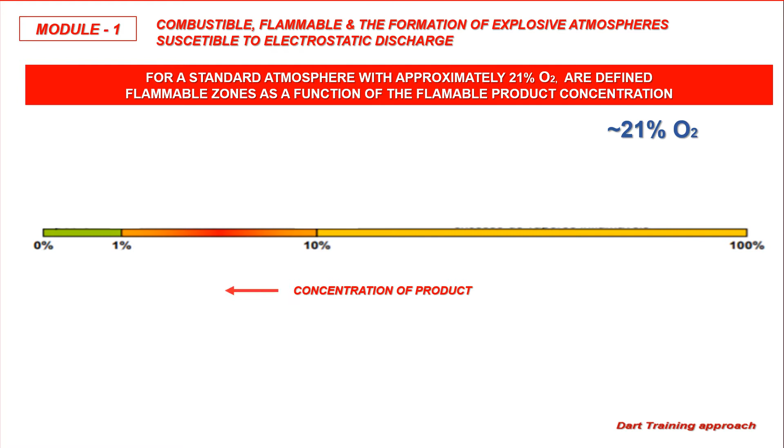So, what really is an explosive atmosphere? Let's take a first approach to the definition, taking as reference an imaginary line that shows relative concentration of flammable and combustible products, from 0 to 100% of product, for an oxidant concentration, in this case O2, fixed around 21%, which is the oxygen concentration in atmospheric air.

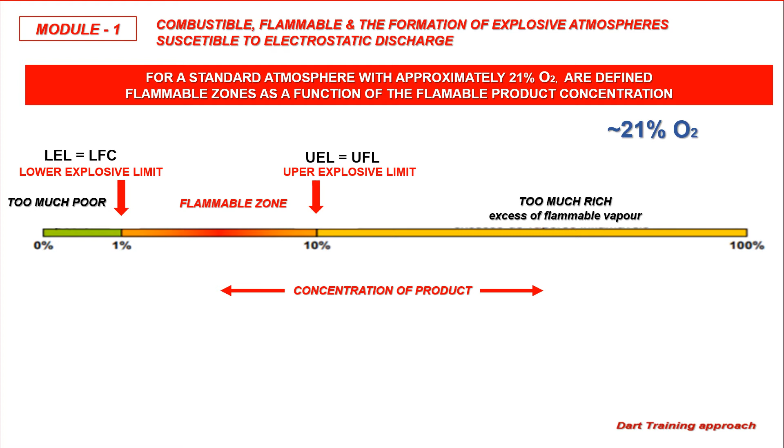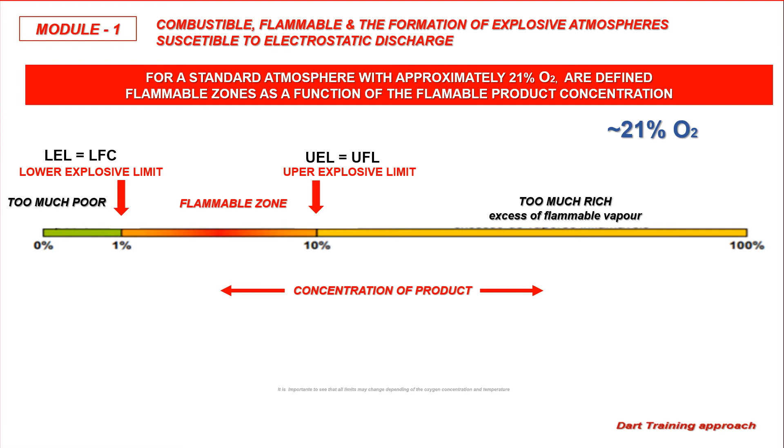The limits for the concentration of flammables are naturally defined, from which flammability and explosion are no longer possible for natural, physical and chemical reasons. We then have the lower flammability limit and the upper flammability limit, as indicated in our diagram. It's important to note that all limits may vary, depending on the greater or lesser presence of oxygen and temperature variation.

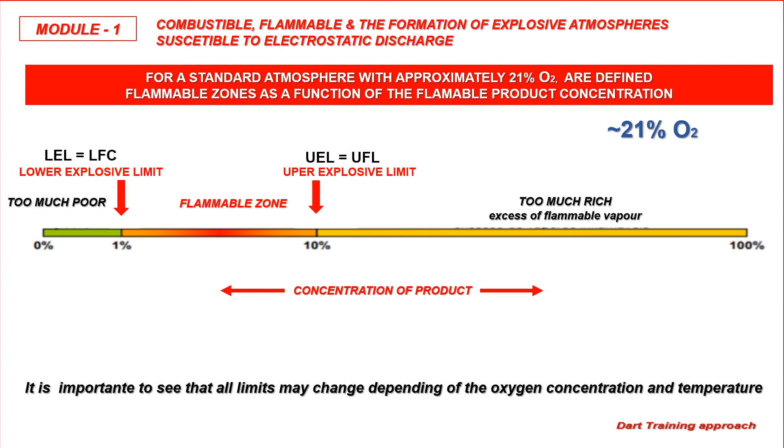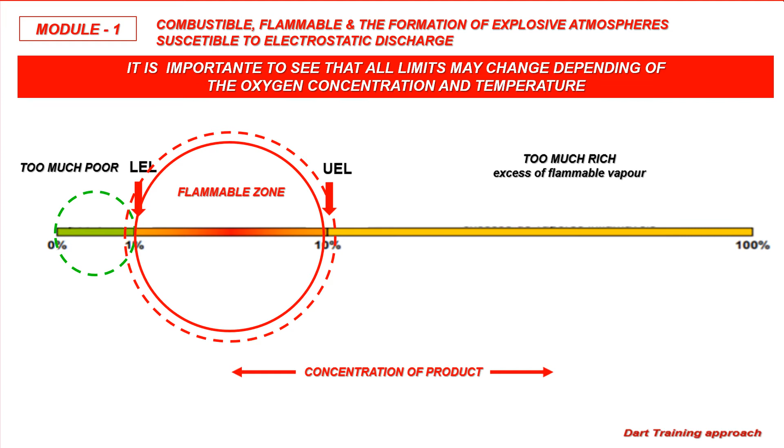The flammability zone is then defined as a configuration of concentrations of the mixture of hydrocarbon vapor and air within the concentration limits susceptible to ignition. Within natural variation of the presence of O2 in the vapor spaces, with the highest oxygen content, the flammability range expands. That is, the lower limit of concentration, or LEL, may smoothly decrease a little bit, and the upper limit of flammability, or UEL, may increase a little bit more.

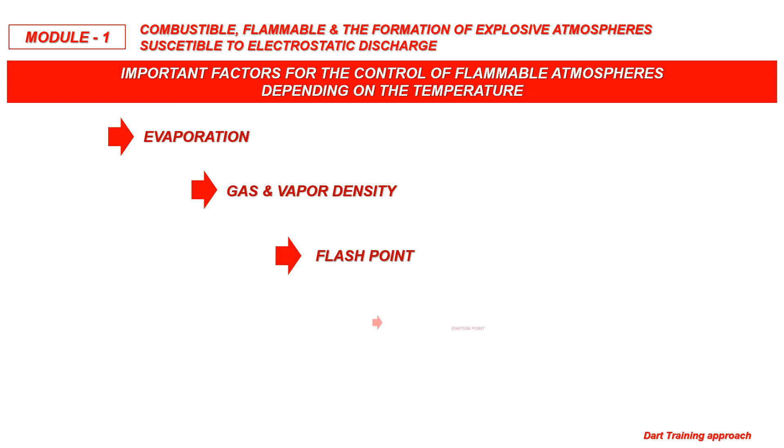As we proceed in the search for a more accurate understanding of the dangerous contingents of explosive atmospheres, it would be necessary to continue talking about at least 5 important factors that, in short, are dependent variables of the available energy, therefore of the temperature. These factors are evaporation, gas or vapor density, flash point, ignition point, and vapor pressure.

As we said before, this is just a sampling of our training style, and obviously we didn't aim to exhaust this topic. These considerations and the wide-ranging topic are better elaborated in our extensive training package. The most expressive variables such as vapor pressure, flash point and ignition point are seen in great detail in Module 2 of our training on electrostatic discharge control, especially in the topic that addresses the attention to handling the products.